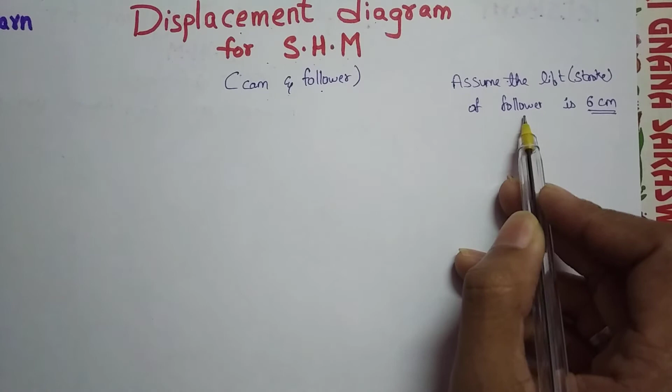Today our topic is the displacement diagram for simple harmonic motion in cams and followers. So let's start. First, we will assume the lift or stroke of the follower is 6 centimeters. Okay, so the stroke is 6 centimeters. So first of all, we will draw a vertical line of 6 centimeters.

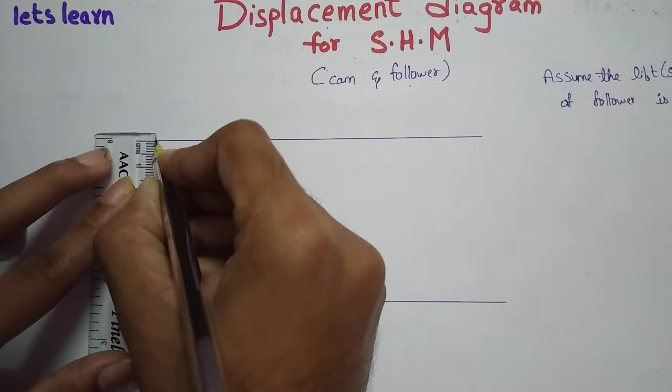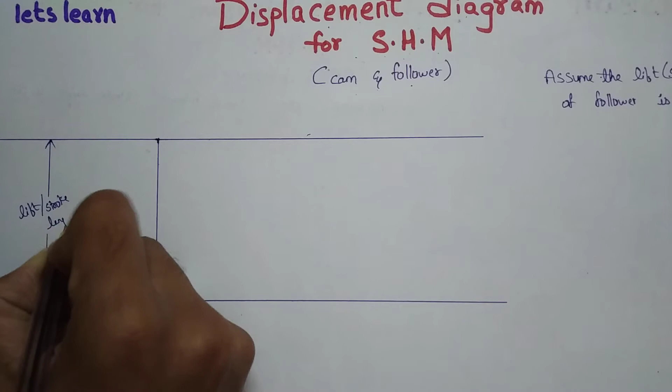Okay, we have drawn a vertical line of 6 centimeters here, and now by keeping the ruler like this, we have to draw horizontal lines along this end and along this end. Now we have taken this as the stroke length. I will represent it here. This is the stroke length, or lift we can say, which is 6 centimeters.

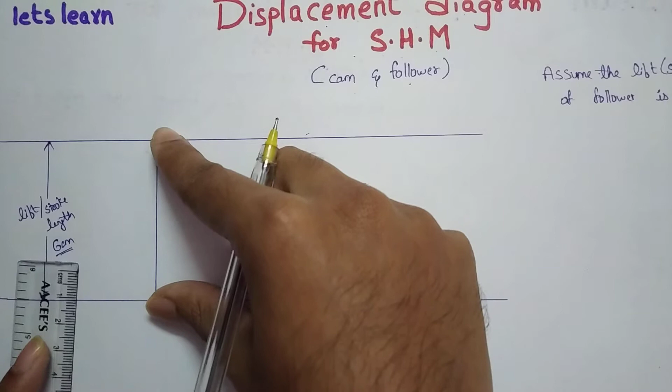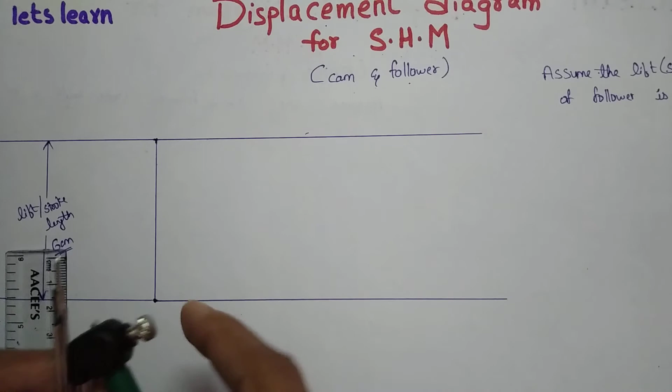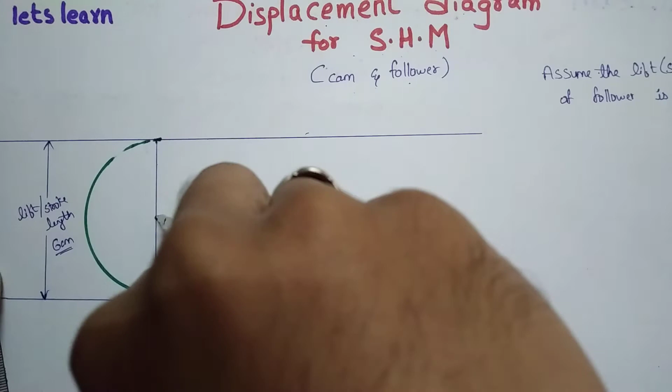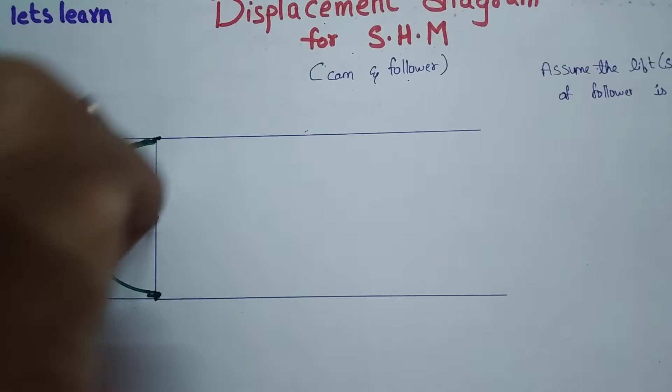So now we have to divide this. First of all, we have to take a compass and draw a semicircle from the mid of this line. So let us do. The mid of the line is here, which is at 3 centimeters because it is 6 centimeters. So now by keeping this here and taking 3 centimeters as radius, draw a semicircle. So like this we have drawn a semicircle.

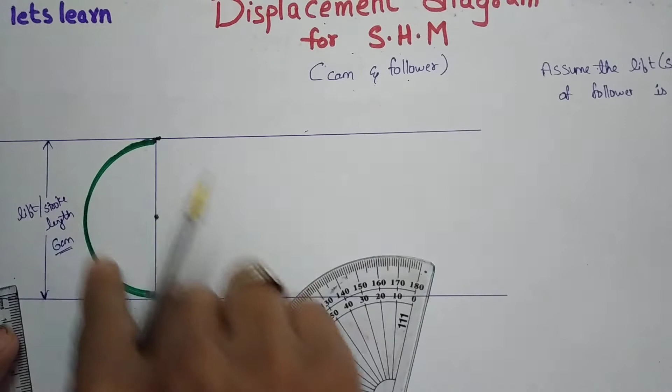Now because it is of 6 centimeters, we have to divide this semicircle into 6 equal parts. We know that a semicircle is of 180 degrees, so if we divide this into 6 equal parts, one part will be of 30 degrees. So by taking this protractor, we will take 30 degrees, then 60 degrees, 90 degrees, 120 degrees, 150 degrees, and this. So like this we can divide this circle into 6 equal parts.

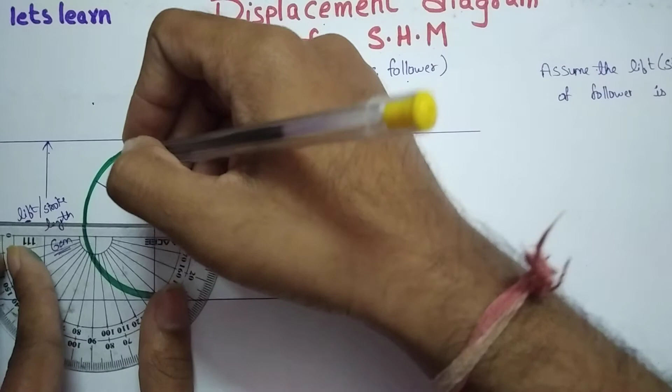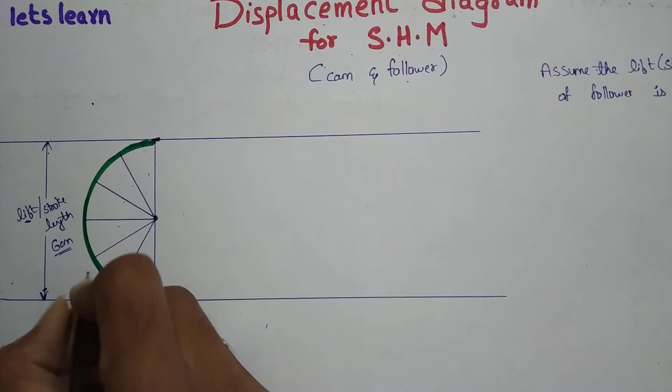This is one part, this is second, third, 4, 5 and 6. You can say 1, 2, 3, 4, 5 and 6. Now keep the numbering as 0, this is 1, this is 2, this is 3, 4, 5 and this is 6. Okay, these points. Now this semicircle we have to draw only in case of simple harmonic motion, not in other cases.

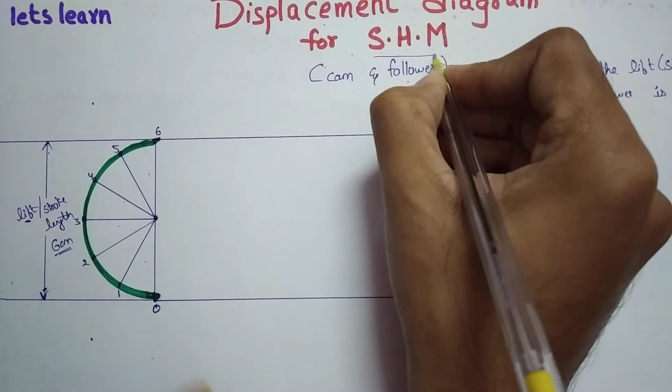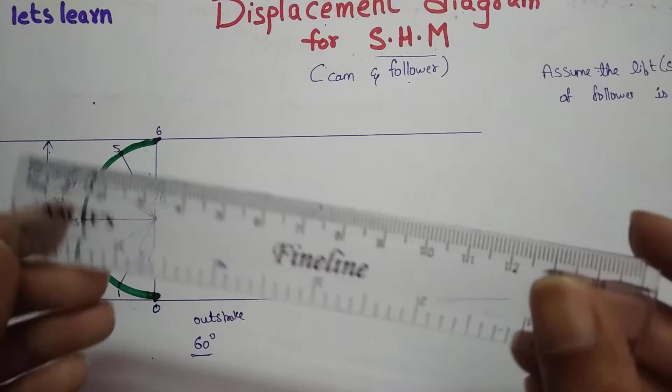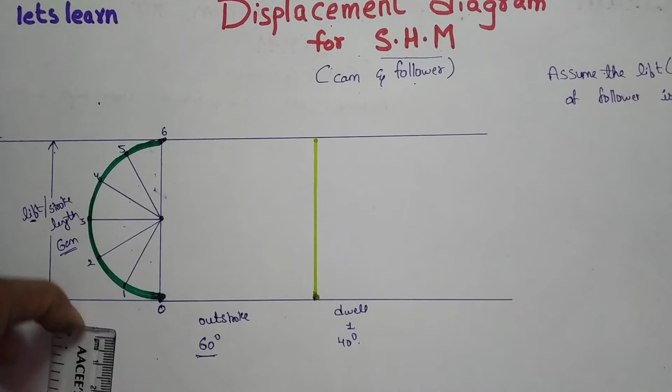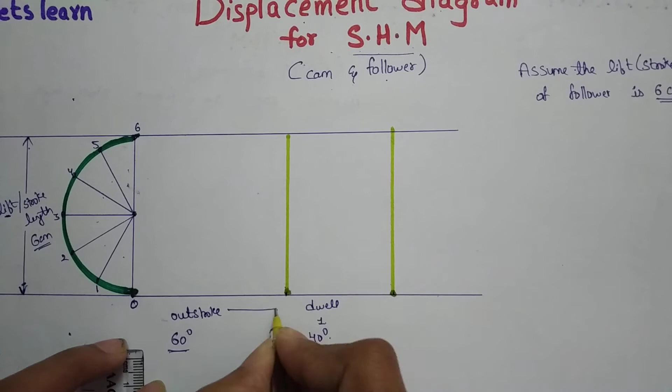Okay, so now we will take the outstroke; let's assume it as 60 degrees. If it is 60 degrees, then we have to take a ruler and draw 6 centimeters on this line. So now we know that from here to here it is the outstroke. Now we will see for dwell 1. Let us assume dwell is for 40 degrees. So we take the ruler again and take 4 centimeters from here to here. Now again draw a vertical line. So from here to here, it is the dwell period. This is the outstroke, this is dwell 1.

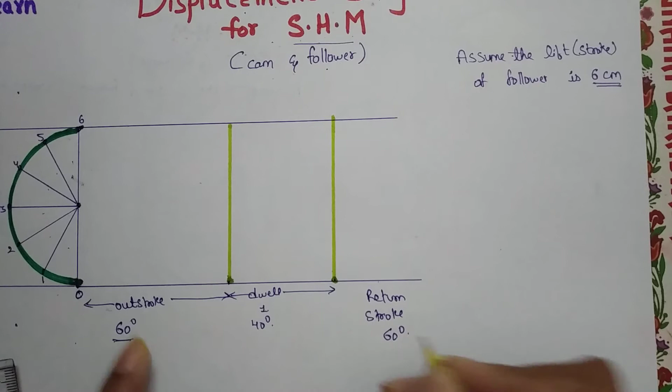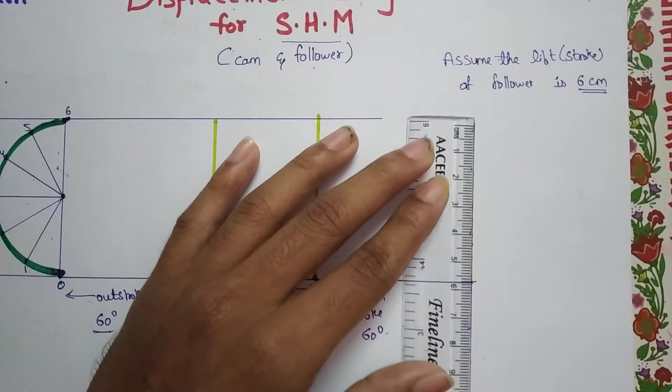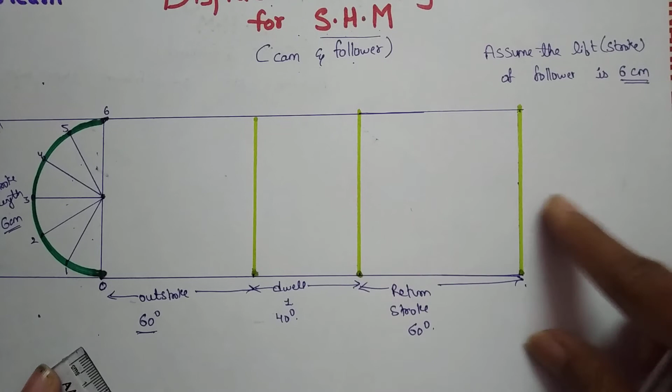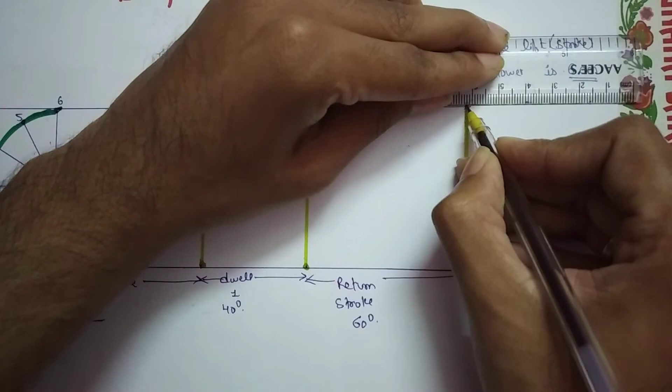Now we have to take it for the return stroke, which is also the same as the outstroke. We will assume it as 60 degrees, so take 6 centimeters again. It means it will come till here. Draw this line and join it above. We will elongate this also. So this is the return stroke. So outstroke, dwell 1, return stroke, and the remaining angle will be our dwell 2. This all will be dwell 2, from here to the remaining.

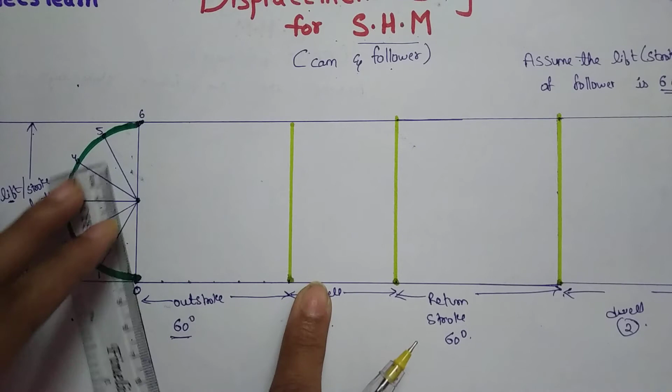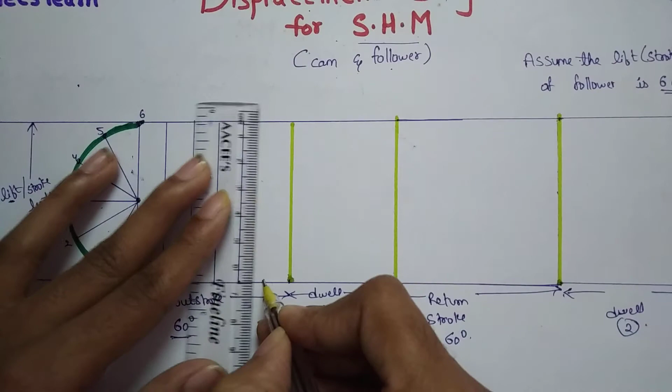So this is of 6 centimeters. So make 6 parts of this line, which means one part will be of 1 centimeter. So take points. We have taken 1 centimeter and divided this into 6 equal parts by joining these lines. See 1, 2, 3, 4, 5 and 6. Now do the numbering: this is 0, 1, 2, 3, 4, 5 and this will become 6.

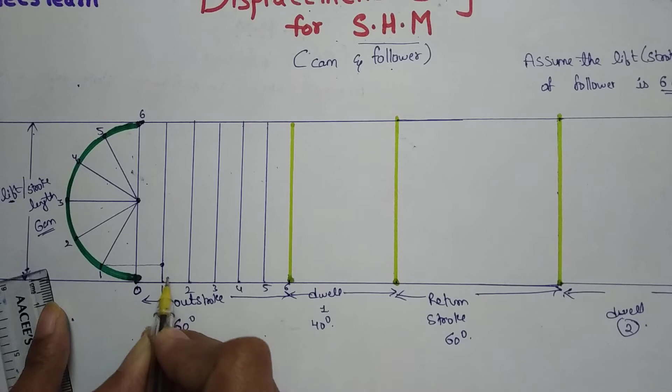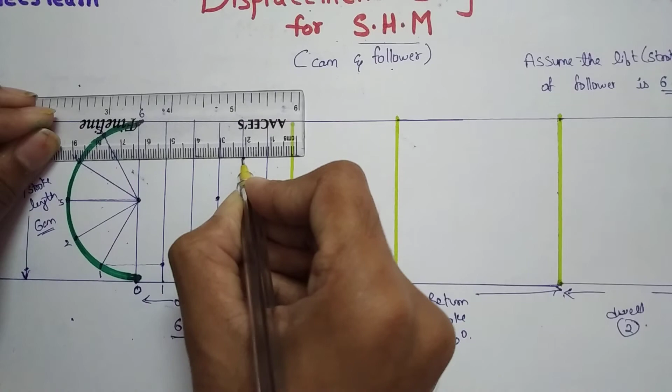Now where this one and this one intersect, here we have to make a point. Again we have to look for the second. See where this 2 and this 2 are intersecting, here, so make a point here, and similarly for the third and this third. These are intersecting here. Now this fourth and this fourth, this fifth and this fifth, and this sixth and this sixth are intersecting here. So highlight these points: 0, 1, 2, 3, 4, 5 and 6.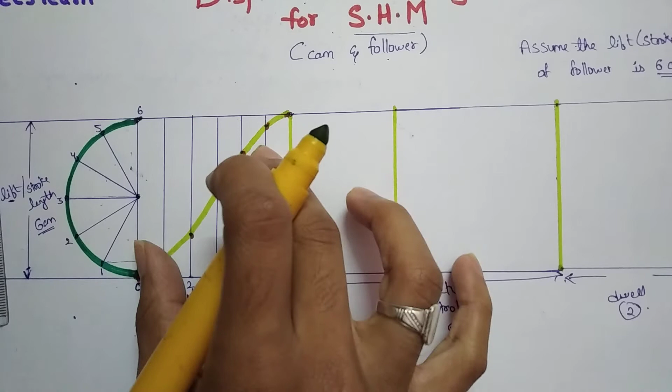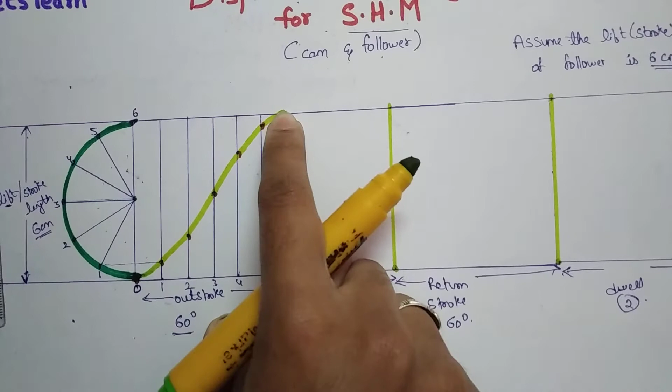Now we have the points. So we have to join all these points by a smooth curve, because this is simple harmonic motion. So this is the curve for the outstroke. Now we will come to dwell. What is dwell? Dwell is the constant position. Constant means the follower neither moves upward nor downward. It remains in a constant position. So keep a straight line.

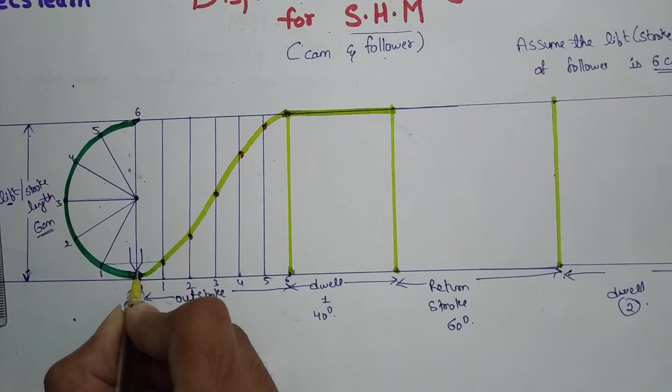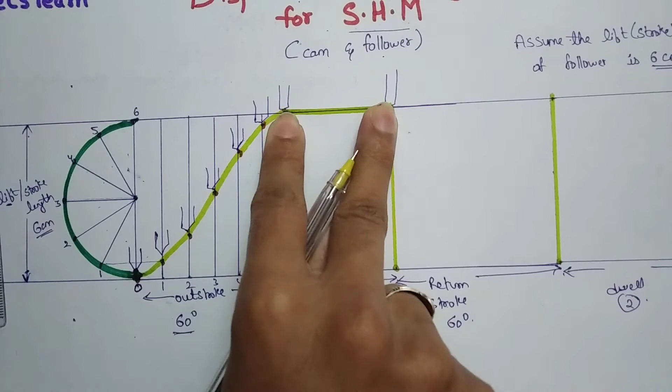Here, for example, I show this is the outstroke. This is a follower, a knife edge follower. It is first at the downward position. In the outstroke it is going slowly upwards. And for the dwell period, it remains constant from here to here. So this is known as dwelling. It neither moves downwards nor upwards. It remains constant. Now we will come to the return stroke.

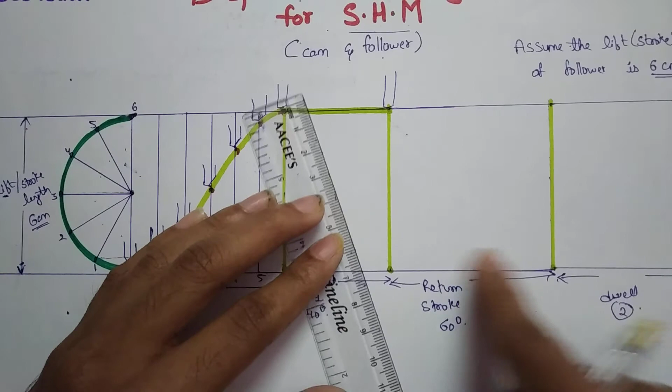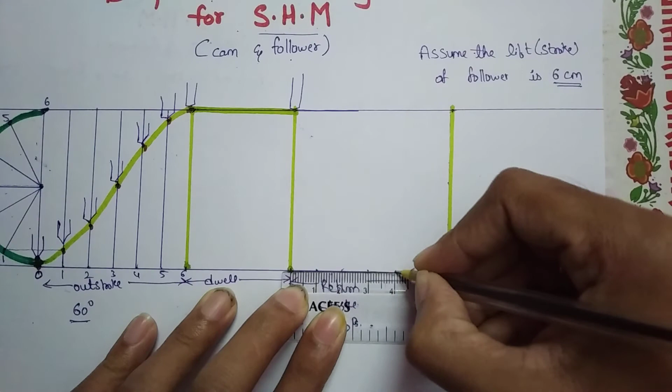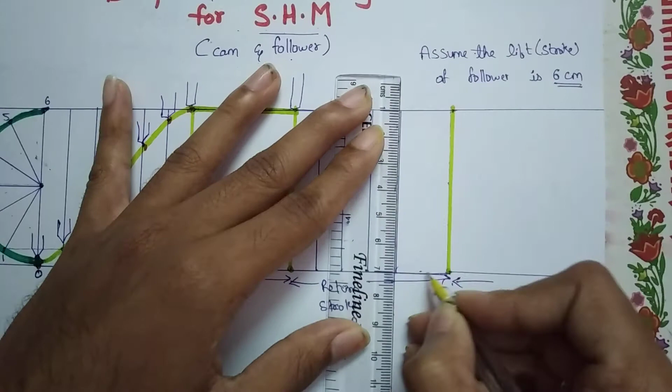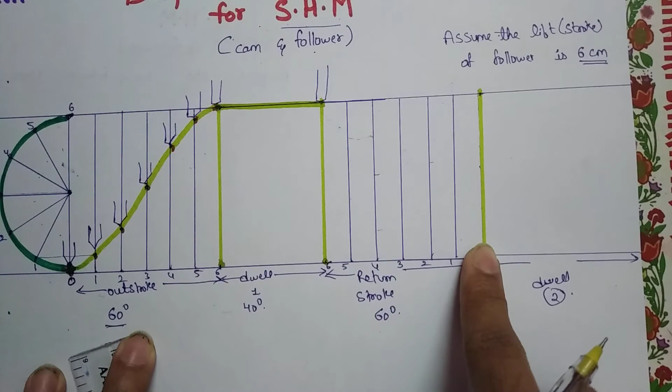Here it is also of 60 degrees, means 6 centimeters. We have to divide this into 6 equal parts: 1, 2, 3, 4, 5 and 6. Now join these vertically upwards. Keep numbering here also, but not like 0, 1, 2, 3, 4, 5, 6, but in reverse manner: 6, 5, 4, 3, 2, 1 and 0, because it is the return stroke. So we have to keep the numbering the opposite way.

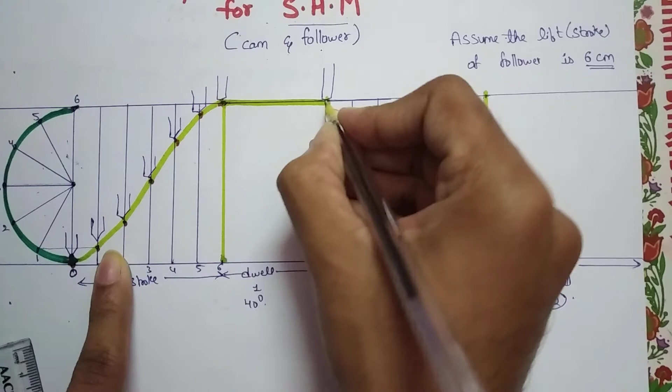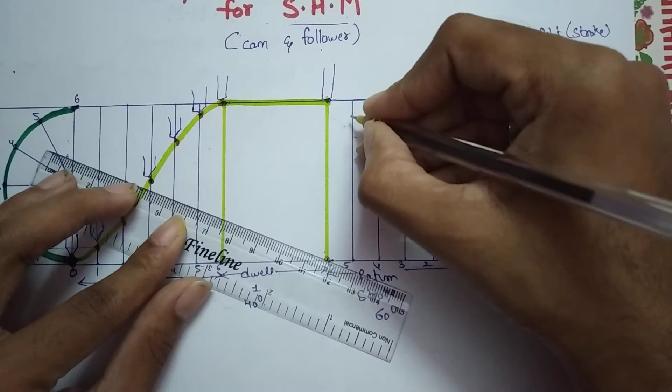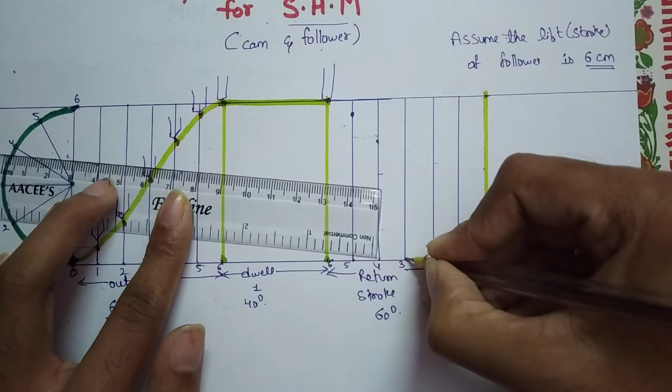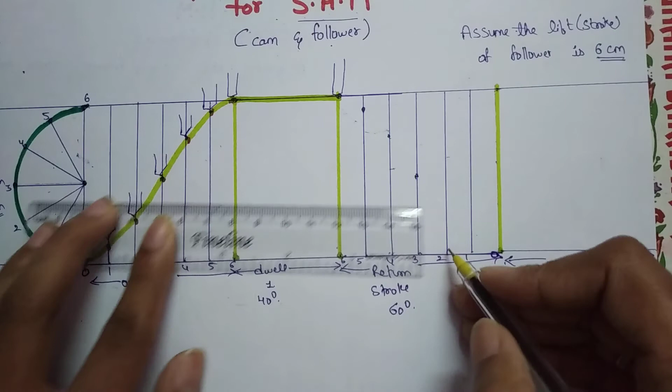So again we have to see the intersecting points. First this 6 and this 6 intersecting point, which is here. Now for this 5 and this 5, see, it is here. For this 4 and this 4, it is coming here. For this 3 and this 3, the point is intersecting here. Now for this 2 and this 2, it is coming here, and for 1 it is coming here.

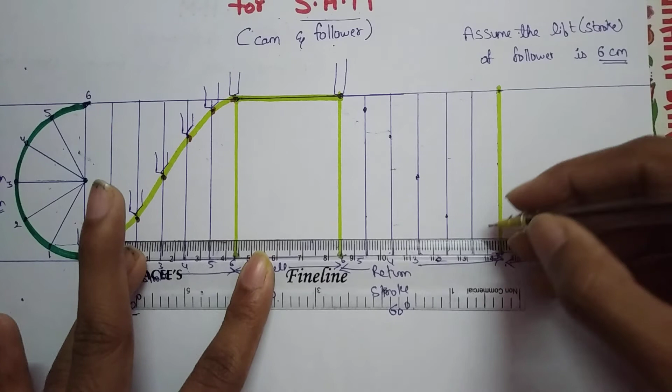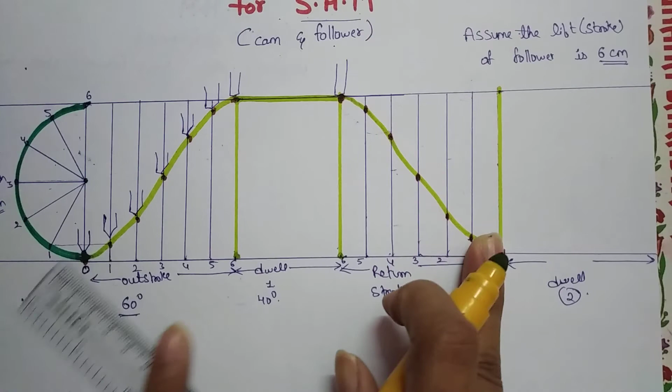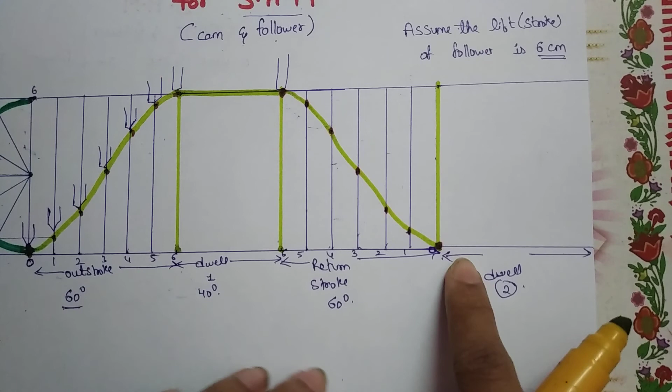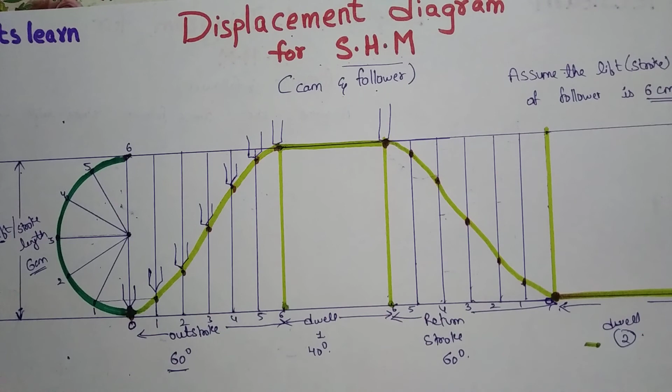Highlight these points. This is for 6, this is for 5, 4, 3, 2, 1, and this is for 0. Now again join all these points using a smooth curve. This is the curve for the return stroke. You can see that the outstroke and the return stroke are similar, they look like replicas of each other. The remaining angle is the dwell period, so we make a constant straight line here. So thus our displacement diagram for simple harmonic motion is completed.